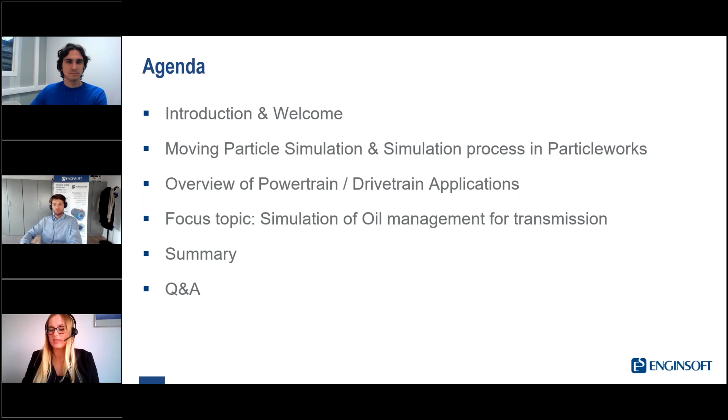Now, I would like to move on and briefly introduce today's 2 key speakers to you. First, I would like to go ahead and introduce our guest speaker, Mattia Porchetta. He currently works as oil management engineer for Tremec in Belgium and will provide us with industry insights into the role of simulation on how to improve the oil management in transmissions for high performance applications.

Mattia, thank you for joining us here today. Perhaps you'd like to give a small wave so everyone knows who I'm talking to. And I really hope I got your last name slightly right. Yes, thank you. Thank you.

The other speaker I would like to introduce to you is Simon Habecke, who works as application engineer here at EnginSoft Germany. He has prepared an introductory presentation on ParticleWorks and its moving particle simulation, as well as an overview of ParticleWorks applications in powertrain and drivetrain for you.

Welcome, Simon. We're glad to have you too. If you want to give a small wave also, so everyone knows who you are. Hello, everyone. Thank you.

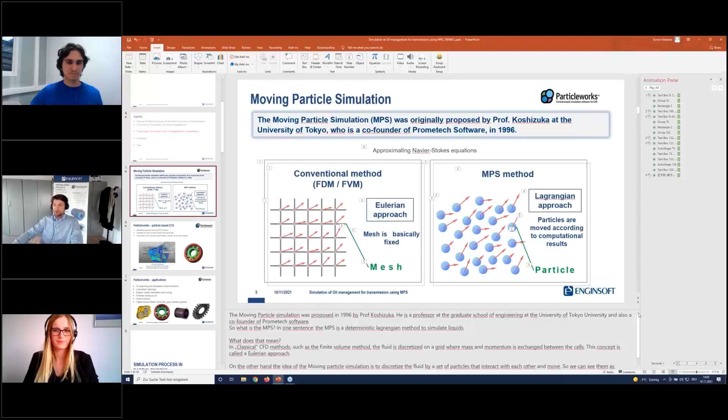So as Alina said, I will take you through a brief introduction of ParticleWorks and the underlying methodology, the moving particle simulation, and then also present some recent use cases that have already been presented before, and then hand over to Mattia, who will tell us a little bit about Tremec's application of ParticleWorks in their development process.

So ParticleWorks is a particle-based CFD tool which uses a numerical method called the moving particle simulation. The moving particle simulation was originally proposed by Professor Koshizuka, who's a professor at the University of Tokyo at the Graduate School of Engineering. He is also a co-founder of Prometech Software, which is the developing company behind ParticleWorks, and he proposed this method basically as an evolution to the smoothed particle hydrodynamics in 1996.

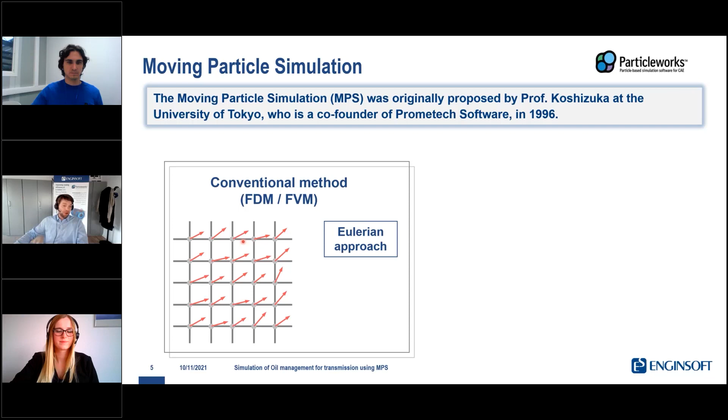So for those of you who are familiar with CFD in principle, you might be familiar with the so-called finite volume method, which is an Eulerian CFD methodology where you basically discretize the fluid volume with a numerical grid on which the fluid movement is solved and simulated.

Instead, the MPS, so the moving particle simulation, uses a particle-based approach. That's the definition of a Lagrangian approach, where the fluid is discretized by a set of dynamic particles. So basically, we can understand our particles as dynamic calculation points which represent our fluid, and these fluid particles interact not only with each other, but also, of course, with the other boundary conditions that we can impose on the simulation model.

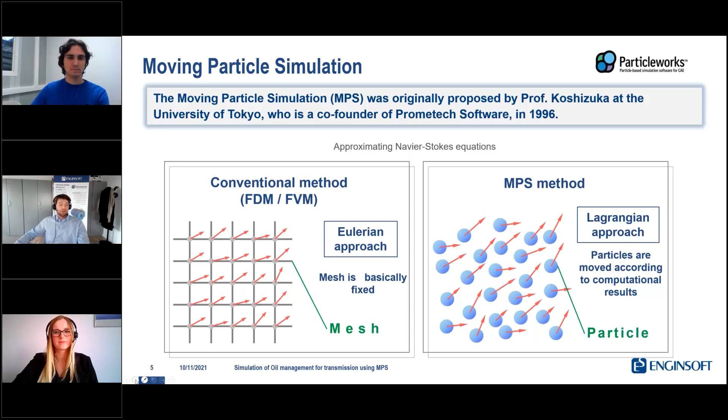And also the MPS, just as most of the finite volume methods, approximates the Navier-Stokes equations as the fundamental governing equations in computational fluid dynamics. So ParticleWorks is a tool that, as said, uses the MPS, since we do not need to extract the fluid volume, but instead can discretize the liquid with our particles.

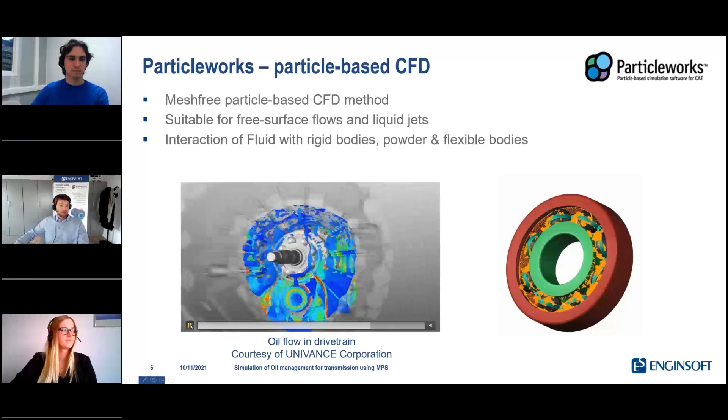We're talking about a mesh-free method, which is especially suitable to simulate free surface flows and related problems like liquid sloshing or liquid jets. And then, as we see here in this animation, we can also simulate the interaction not only with rigid bodies, but there would also be other applications where we can potentially extend the model to also introduce sand into the gearbox, for example, which in real life, of course, we want to avoid, or also include flexible bodies into the system.

And then what we see here on the right-hand side shows ParticleWorks' capability to also simulate highly viscous or non-Newtonian fluids such as grease.

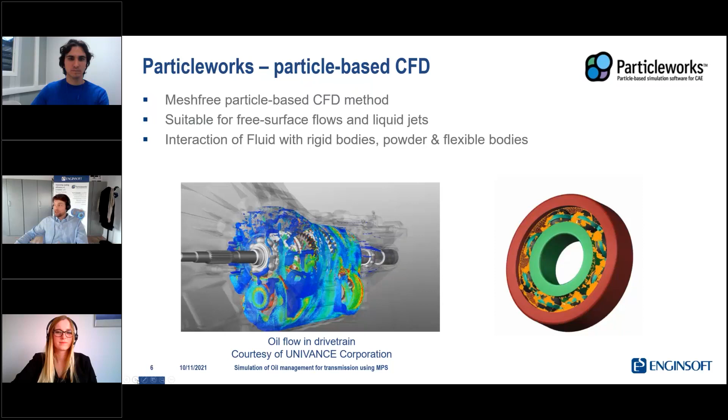So the type of applications which we can handle with this sort of methodology range from oil splashing and lubrication of gearboxes and transmissions, and we will learn later more about that from Mattia. Then in the overall topic of lubrication, of course, we can also have a closer focus on bearings themselves.

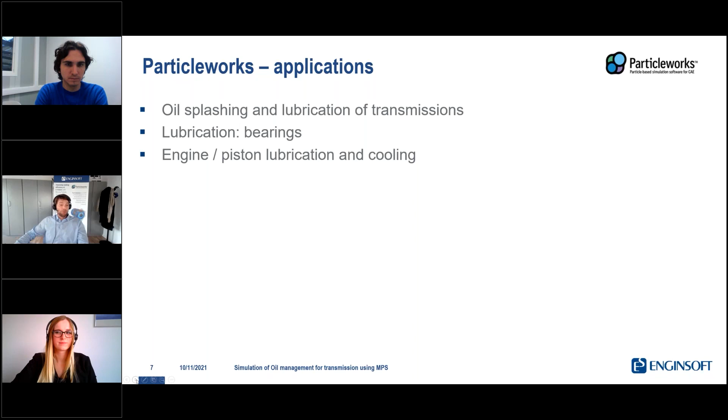Then with the same methodology, we can also handle certain applications in the field of engine or piston lubrication and also cooling. So this actually covers both conventional internal combustion engines as well as electric engines, which nowadays are more and more internally cooled by oil jets.

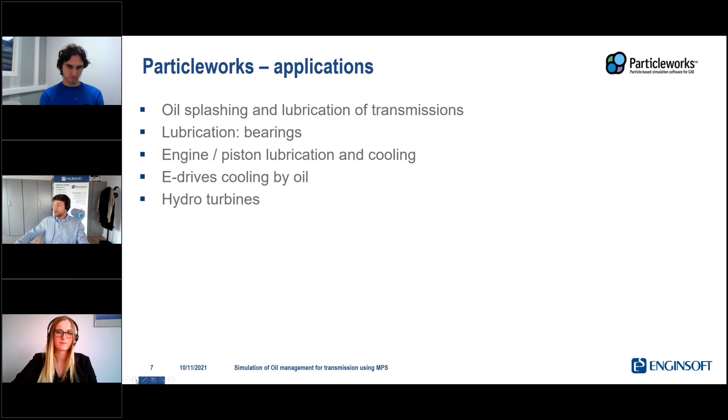Then in a slightly different industry, in the energy sector, we can also perform simulation of hydro turbines, which is particularly efficient for turbines like a Pelton or a Banki turbine, where we also have free surface flows. And then more focused on the process or chemical industry, we can also simulate highly viscous or non-Newtonian fluids ranging from chocolate, glue, cement, or grease, just to give you some examples.

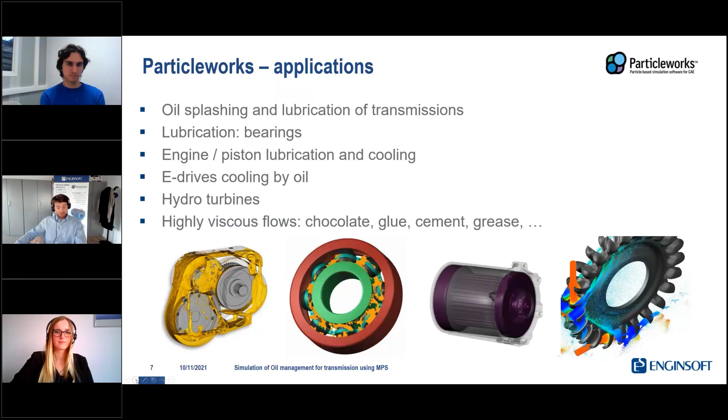So now we see all these nice animations which show some of the visualization options that ParticleWorks can provide us during the post-processing. So in the next slides, I will give you a very brief overview to give you some impressions about how such a simulation is potentially set up, to give you an idea of the simulation workflow.

So the first step actually takes place before the simulation, with the geometric preparation of the model, which we then import into ParticleWorks. In principle, we do not need to perform any larger simplifications, but basically we just export each part, like a shaft or a gear, that later in the simulation model we want to set with a separate kinematic motion into a separate file, and then export these parts as separate STL or OBJ files, which are the formats that ParticleWorks can read. So inside of ParticleWorks, we basically import the non-simplified geometries.

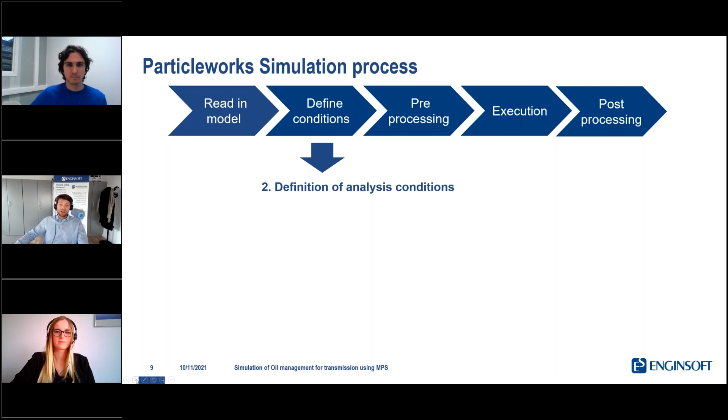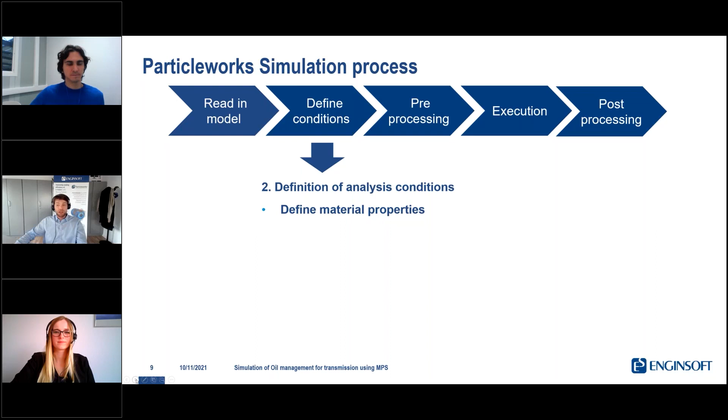Then in the next step, we define the analysis conditions. So that includes, first of all, the material properties which characterize our fluid. For oil, this would be the density, kinematic viscosity, and some surface tension parameters. Then we also need to define the kinematics, so the motion of our shafts and gears.

And then to introduce the oil or the liquid into our simulation model, we can define both in the same model: a filling plane, which can introduce an initial fill level into the simulation model, and also inflows and outflows, which can introduce new oil into the simulation and also take oil out of the simulation. And therefore, this also enables us to model forced lubrication systems.

Then, of course, since we're talking about a simulation tool, we also need to set some numerical parameters like the time step, which is typically estimated by our rotational speed, and the particle size which we are using for the simulation, plus some other numerical settings, which we won't cover in this webinar.

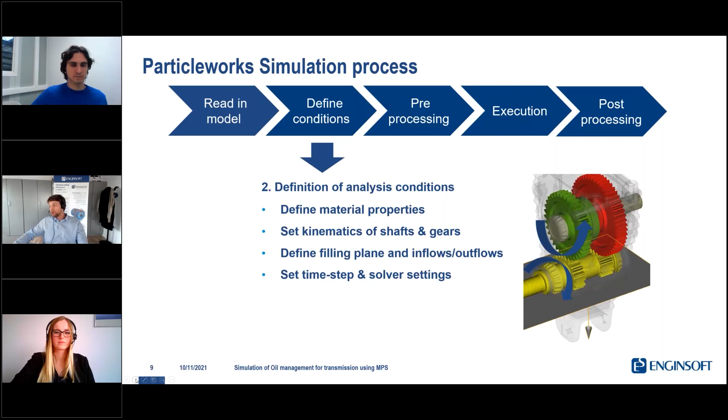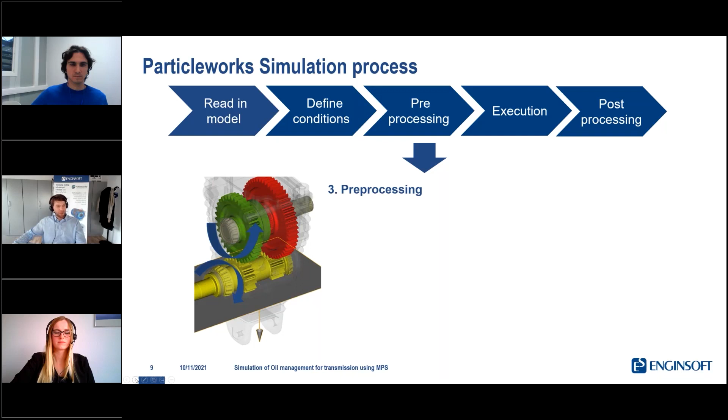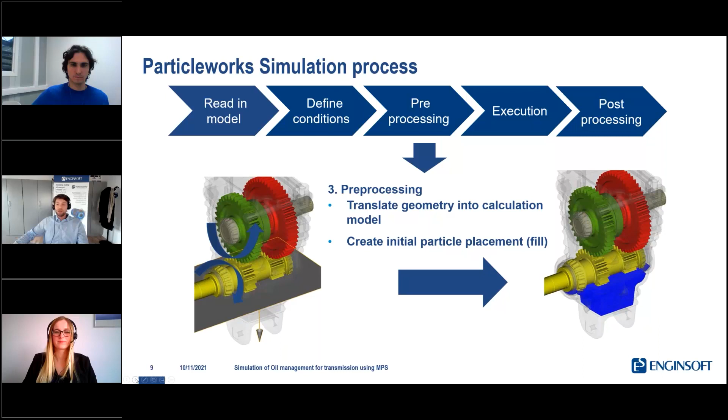So after we imported the geometry and defined our kinematic conditions, the pre-processing of course comes first. During the pre-processing, the geometrical model is first automatically translated into the internal calculation model which is used by the actual simulation. And then the initial particle placement, for example during the fill operation, is also performed, so that our gearbox might already be pre-filled with oil particles.

Then during the actual simulation, we perform the calculation, which will calculate our liquid movement. We can use one, or depending on the model size, multiple GPUs. We can also leverage CPU clusters, while according to our experience, the use of GPUs is more efficient. The software runs both on Windows and on Linux.

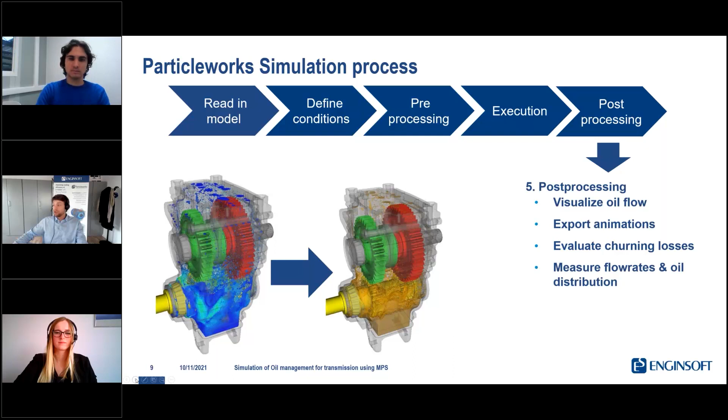And now coming to the aforementioned post-processing. This gives us the insights we are looking for by using the simulations, which can be the visualization of the oil flow. We can export animations, in principle also evaluate the churning losses, and also measure flow rates and the oil distribution in different parts of the housing.

So the advantage such a meshless simulation approach gives us is the overall reduction of the simulation time, since we do not need to simplify the geometry, we do not need to perform any meshing, and it's very robust and easy to implement complex kinematics.

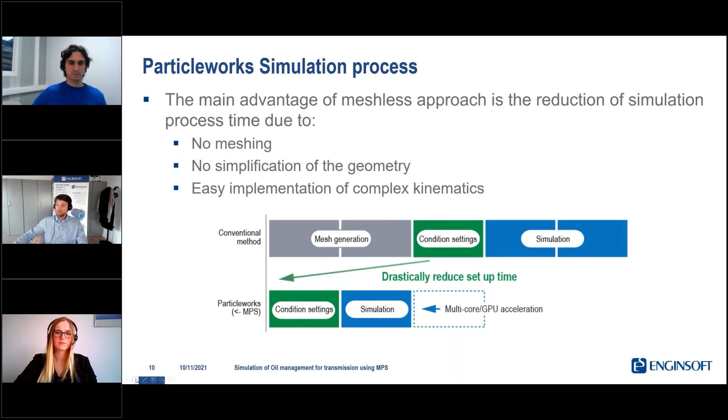So now coming to some applications that have been presented in webinars or at conferences before. I will just give you some key points.

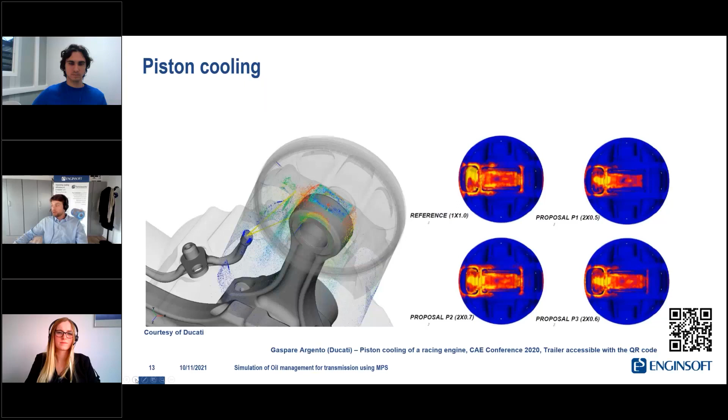So the first application I wanted to give you a brief peek into was presented by Ducati Corse at the CAE conference last year. In this case study, Ducati presented their application to evaluate and then also optimize different nozzle configurations with the aim to maximize the HTC distribution on the undercrown of a motorcycle piston.

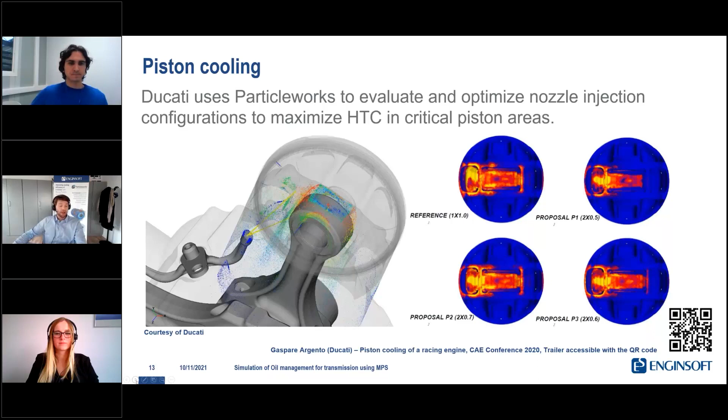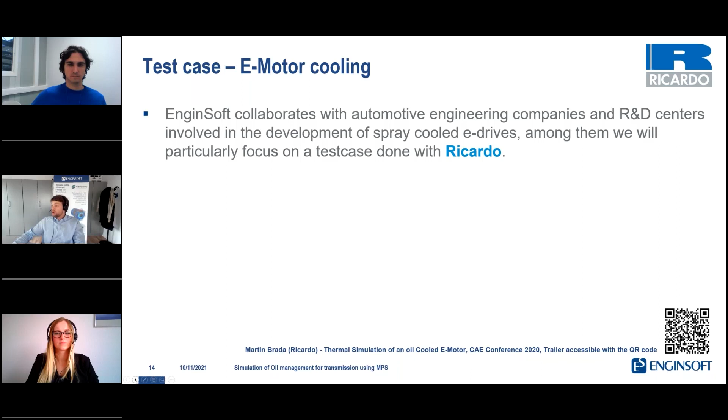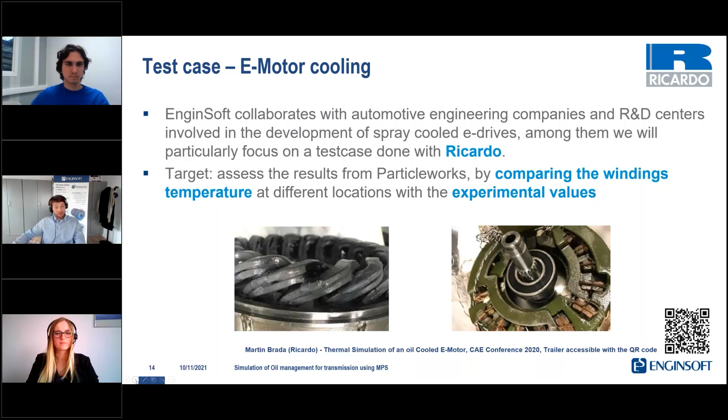Then a similar application from a software perspective, in terms of what was simulated, was also presented at the last CAE conference in collaboration with Ricardo, but this time the aim was to simulate the internal oil cooling of an electric motor, with the target to compare the winding temperatures at different locations with experimental values. In that simulation workflow, ParticleWorks was used to simulate the oil distribution and HTC distribution on the windings due to the oil jets sprayed from the rotor shaft, to finally calculate the resulting temperatures in the windings with the help of an FE tool.

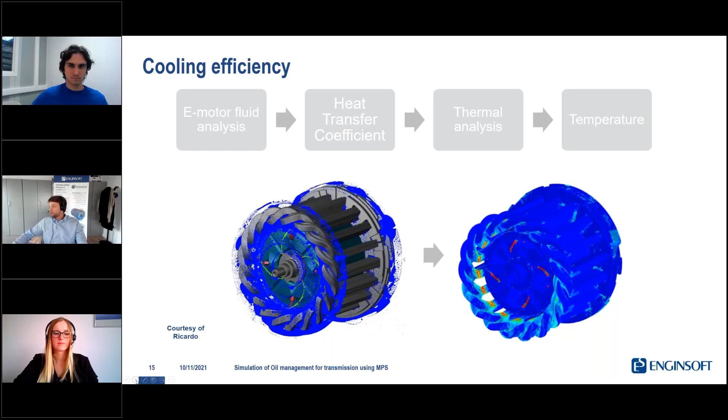In the result of this case study, we were also provided with some absolute values regarding the difference between experimental values and measurements, which were below the requirement of 5 degrees Celsius. So this gave some confidence and validation into the use of ParticleWorks for such applications.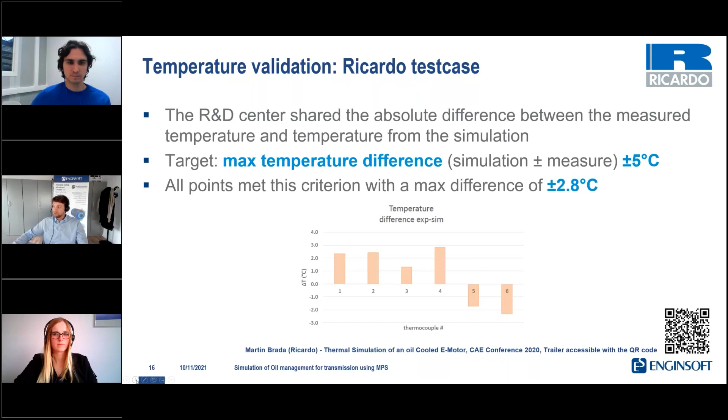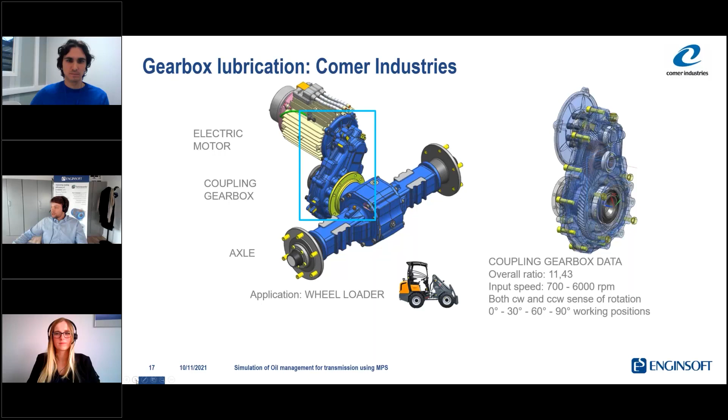So now I will come to the last case study, which was presented by Comer Industries at the CAE conference 2019, or actually 2018, where the objective was to simulate the oil distribution in a coupling gearbox between an electric motor and an axle of a wheel loader. The aim was to compare the oil distribution in different operating conditions, like the mounting position and also the operating speed, and finally to assess the bearing lubrication in all these different operating conditions.

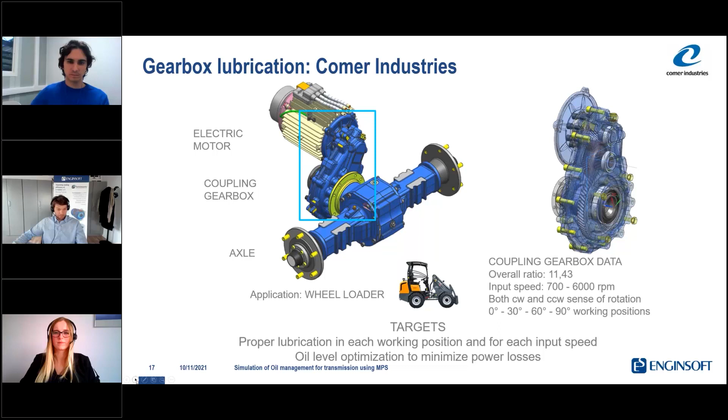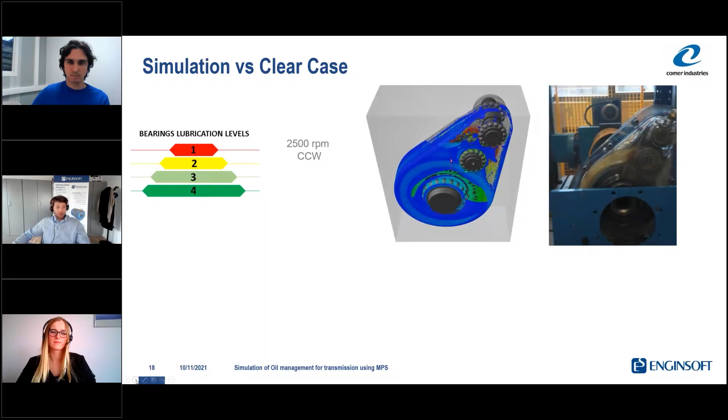So here, they not only did a visual comparison of the oil flow patterns, but also evaluated the qualitative lubrication of the different bearing positions with the help of a qualitative scale. And Comer found that there was a very good correlation between experiments and tests for this type of gearbox. Just by the coloring, we can see that there was a very good correlation. My personal highlight is this flooding of this bearing, which could be identified both in the simulations and the experiments.

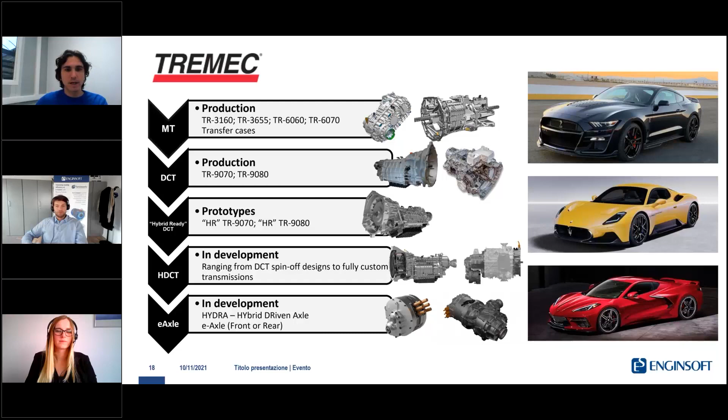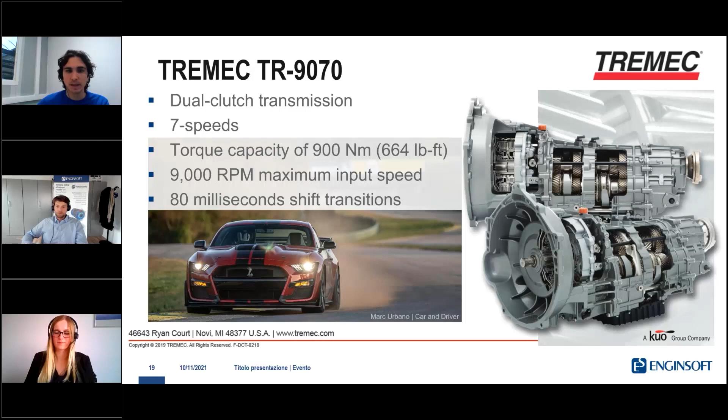For the test case of today, I will refer to the TR9070. As I said before, it's our inline DCT transmission. It's 7-speed. It can transfer up to 900 Newton meters with a maximum input speed of 9,000 RPM. And it can shift in very short times of only 80 milliseconds. So why is oil management important for our products and in particular for our transmissions?

Well, first of all, because of lubrication. In general, we want to avoid metal-to-metal contact between mating surfaces, as this can lead to excessive wear or even damage and potential failure of the part.

Not only that, the lubricant can also act as a coolant, so it's needed to dissipate the heat generated. There can be different strategies for lubrication. I will not go into detail, but some of these are, for example, splash lubrication or forced lubrication. So it's important to have proper lubrication in the transmission, and it's also important to do this efficiently.

Well, I think all of us know that it's very important nowadays for car manufacturers to keep fuel consumption low. But not only this, inefficiency will translate into heat generation. This can potentially lead to high temperature, overheating and hotspot issues. So being efficient means it's going to be easier to design a proper cooling circuit and cooling system, and also downsizing some of the components like the heat exchanger.

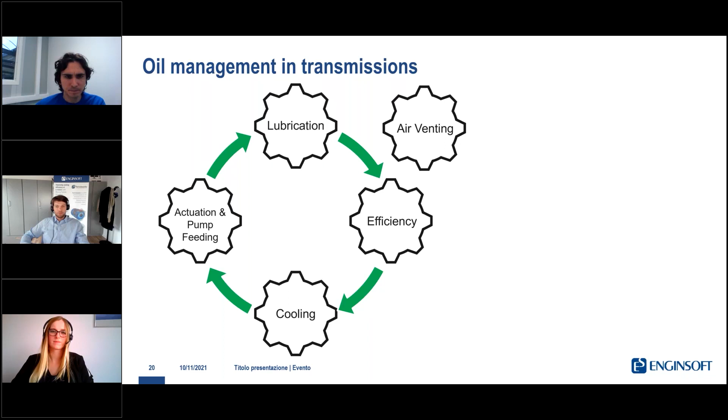So how do we monitor all of these parameters? Well, first of all, we started with CFD. We extensively use the moving particle method. During last year it proved to be quite effective, and it's a powerful tool. It gives you a lot of flexibility. It's very easy to change the geometry and perform thought experiments, like playing with the input conditions and the boundary conditions. And we mainly use this to drive the design from the very early phases of our project.

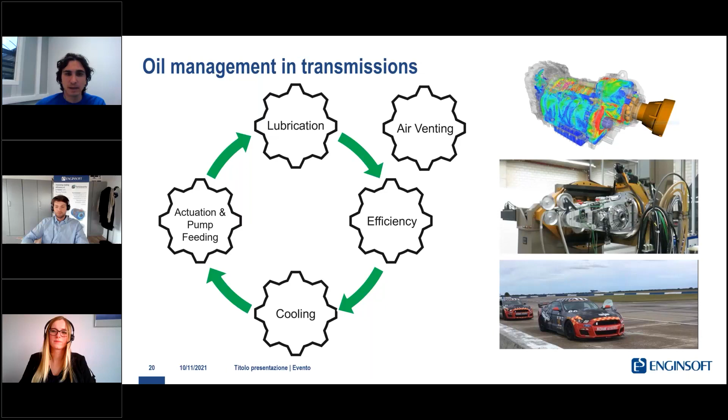The final validation, of course, has to happen in the vehicle. This, I will say, is the least flexible kind of test because it's very difficult to access the transmission. It's time consuming and also very, very expensive. So usually you want to perform this kind of test during the advanced phases of the program. You don't really want to use this kind of test for the initial development of your product because it's going to be very, very expensive.

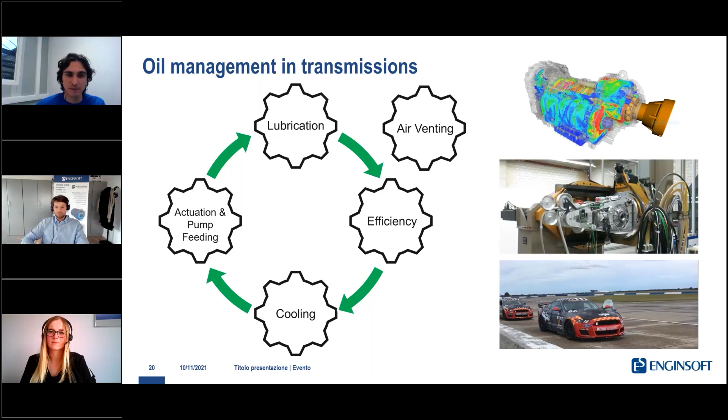So what happened with our TR9070? At that time, we were not using the moving particle simulation method, so we didn't go through the workflow that I just presented. And we ended up at a very late stage of our program with a suction issue. This happened in the vehicle. We were testing at Gingerman track, and in a specific corner with a specific driver, after the long straight, when braking into a left corner, we experienced some oil starvation in our sump, and this led to a system pressure fault with the clutch disengaging and not being able to transfer the torque for a while.

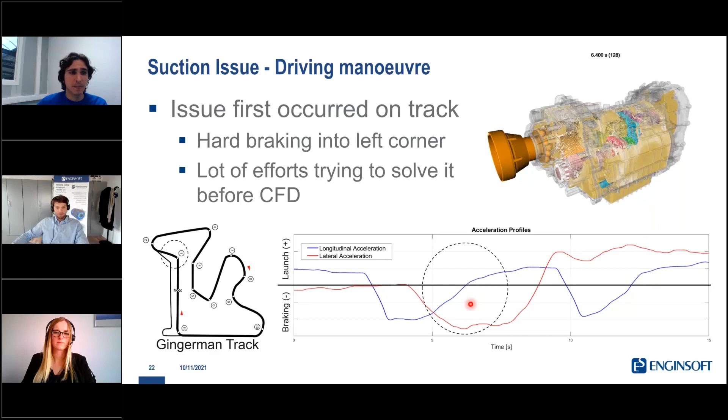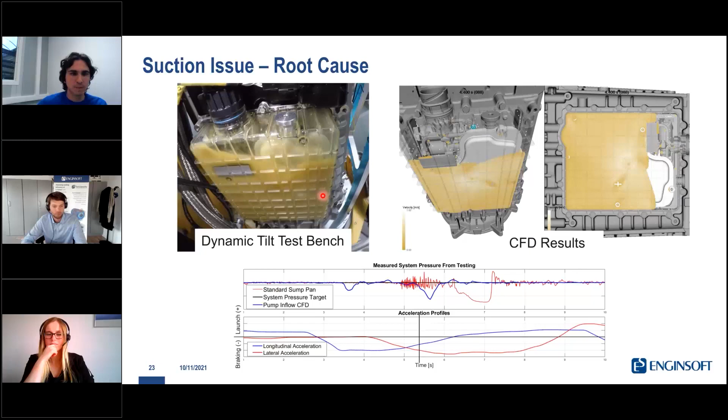So here at the top, you can see the comparison between the test results and the CFD results. I will say that from a qualitative point of view, the oil behavior is very similar and more or less the same between the two. But not only that, we also found very good correlations between the quantitative data from CFD and dynamic tilt test.

For example, in this graph, with the red line, we see the measured system pressure. And what we can see is that in correspondence of this point, we had some system pressure ripple, meaning that some air was being sucked until we had a very big system pressure dip. That was the actual issue that we were experiencing in the car.

Same if we look at the CFD results, that's the blue line. In this case, we are not measuring pressure, but we are measuring the inflow to our filter. What we notice is that we have a first flow drop, and then a second drop, bigger in amplitude and magnitude.

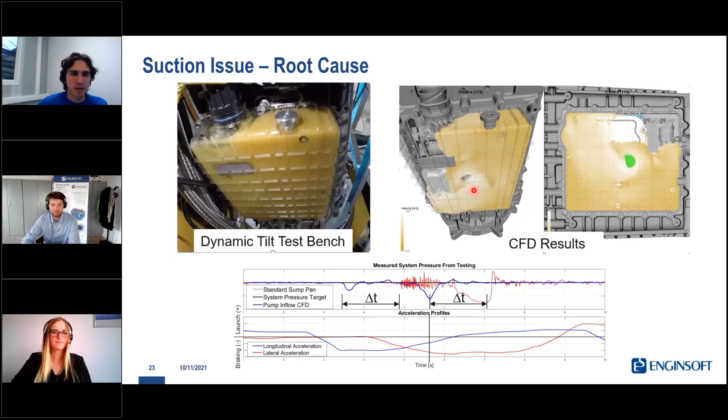Of course, there is a shift in time between the CFD and the test results. This is mainly due to the fact that in our transmission, the measurement of the system pressure happens downstream with respect to the point where we are measuring the inflow in the CFD.

Another thing that we noticed from the CFD results was this kind of swirling motion. So the oil tended to move along the outer walls of the sump pan, leading the pickup of the pump or the inlet of the filter to be exposed to air.

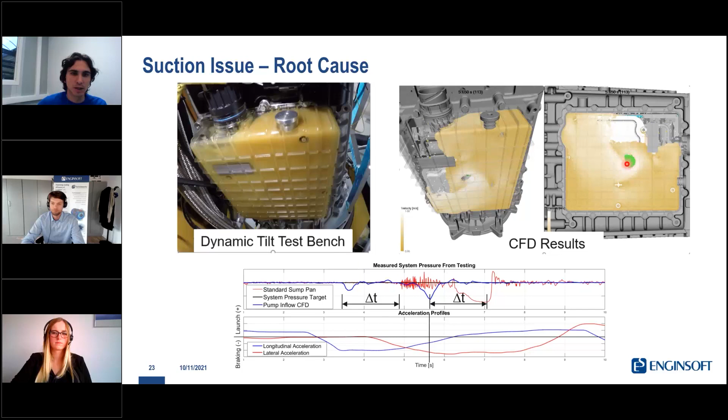So what we did, well, as I said, we were in an advanced stage of our program. We needed to find a quick solution, and we tried to introduce some guiding features, some fins in the sump pan, with the idea of forcing the oil to always move towards the center of it, where the inlet of the filter was located.

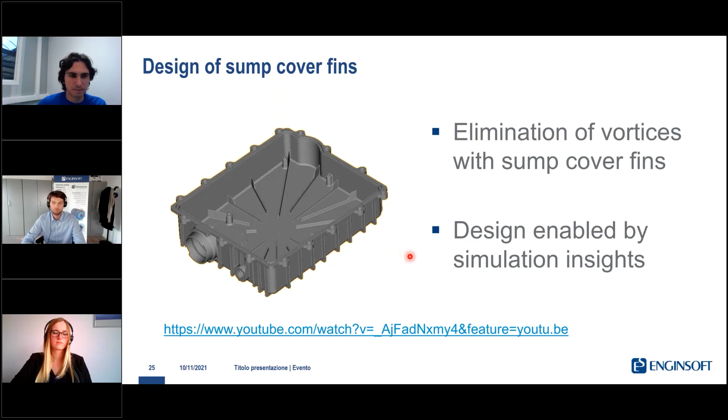We then performed a CFD simulation to, let's say, compare the standard sump with a modified one. And what we saw was that during the critical condition, the swirling motion disappeared, and the inlet of the filter was mainly submerged in oil. We then came up with a first prototype, and we went back on a test bench, and we had a good correlation with what we observed in CFD.

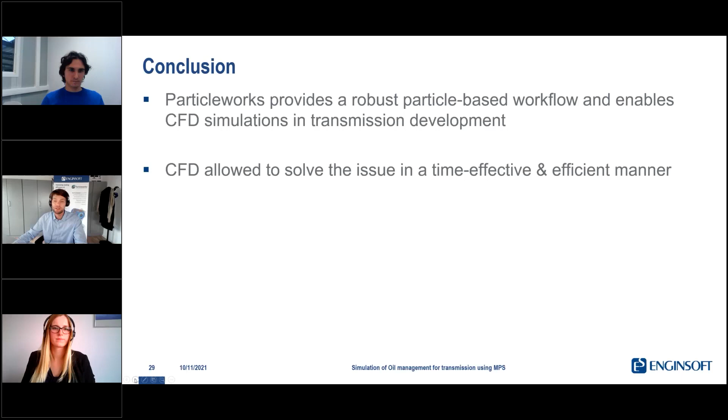And then, as Mattia pointed out, this use of CFD in the development process allowed us to solve issues that were very difficult to solve before, and also in a time-effective and efficient manner, with some good correlations between simulations and tests, overall really bringing down the development time and improving the product by also gaining deeper insights into the design.